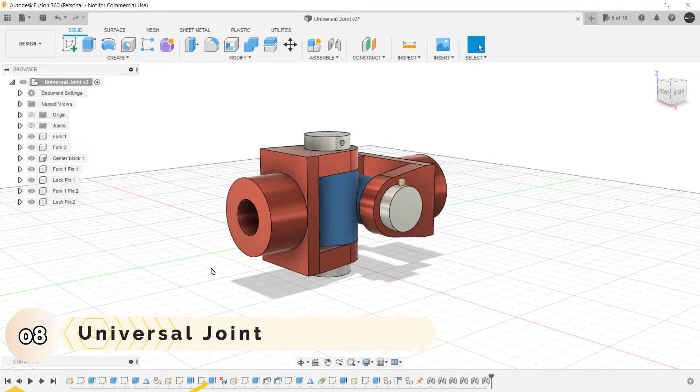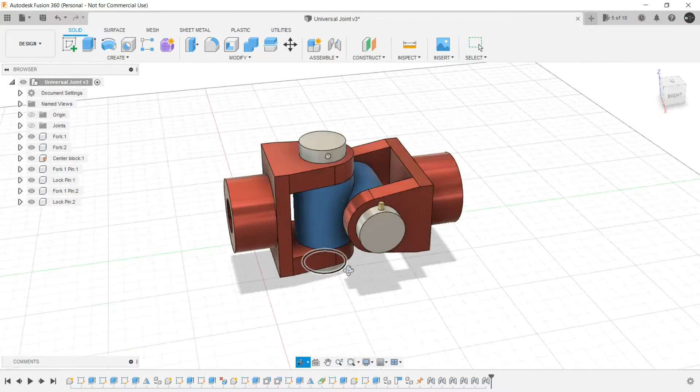Now the very first assembly that we are going to create is of universal joint. A universal joint is a joint or coupling connecting rigid rods whose axes are inclined to each other, commonly used in shafts that transmit rotary motion. It consists of a pair of hinges that we call fork, oriented at 90 degrees to each other, and connected by a cross shaft that we are calling center block here.

I have made this assembly beforehand for reference, in order to have a better understanding of how each and every component is connected to each other. Now let's start with the assembly.

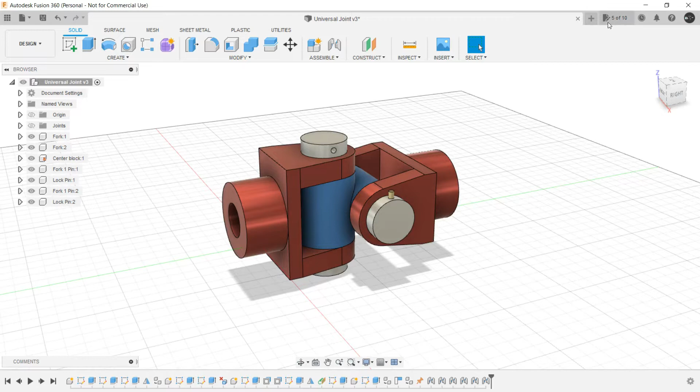Just click on new design. Let's save it, Ctrl S. Let's name it Universal Joint Exercise. And as you can see in the browser itself, the untitled status is changed to the name of the file itself. So this we are calling as a head assembly. This one is the head assembly.

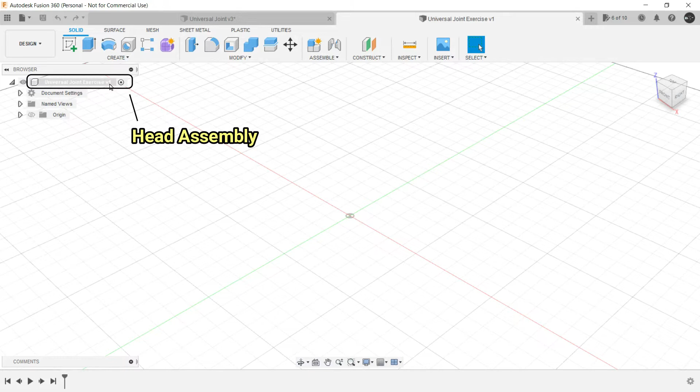Now the first component that we are going to create is this fork. I have hidden all the other components because we are going to create each and every component one by one. So first we are going to create this particular component, the fork. For this, go to assemble toolbar. Always go to assemble toolbar when you are trying to create a new component.

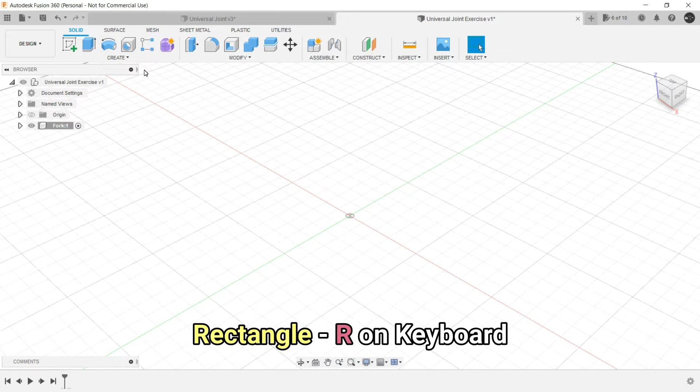Let's name it as fork. Invoke rectangle command, the keyboard shortcut is R, and select any of the vertical plane. Let's select this one. As soon as we have invoked the rectangle command, we have a sketch palette in which we have the option to change the type of rectangle we are going to make. Let's select center rectangle from here.

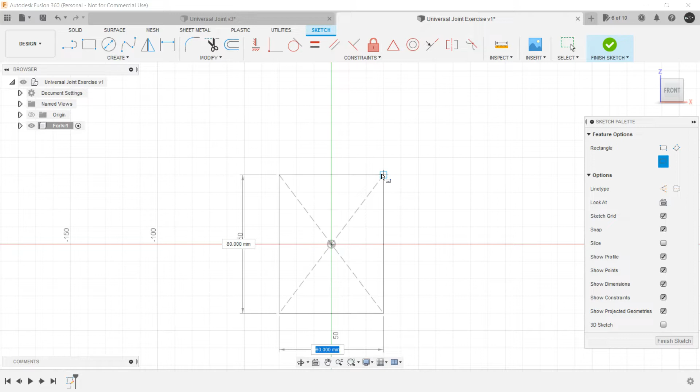And then provide any dimension, because all the assemblies that we are going to create in this course are not to dimension. My aim is to make you familiarize with the assembly making process in Fusion 360. You can incorporate dimensions as per your requirement or your client's requirements. I will let you know wherever some crucial dimensions are required as we move forward in the course. So let's select any dimension for now.

Click on finish sketch. Select this region, press pull. And then select this particular face.

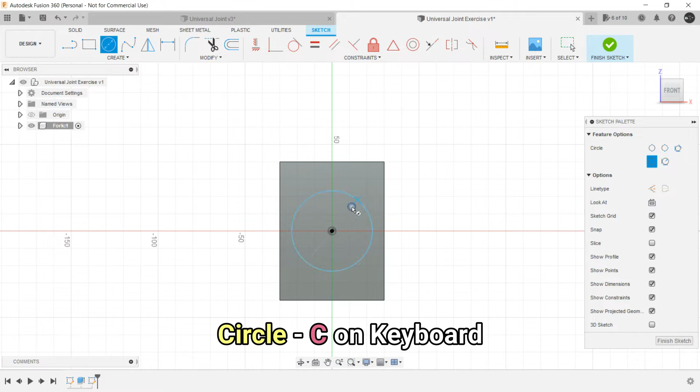Invoke the circle command by pressing C in the keyboard and create a concentric circle. Again, let it be of any dimension. Press pull this one outwards and click on OK. So we are done with this particular section of this particular component.

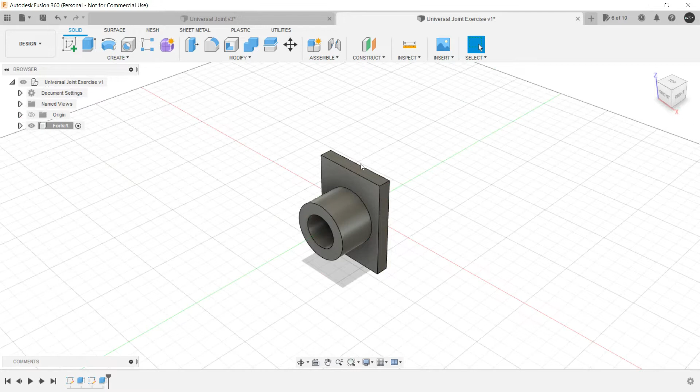Now we will be creating this profile. For this we will select this particular face, invoke the circle command, trace the origin, make a bigger circle, and then inside a smaller circle whose dimension we are going to remember. Let it be like 15, or better make it 18.

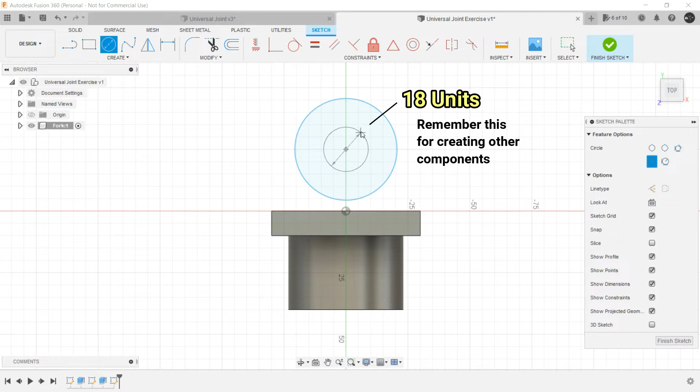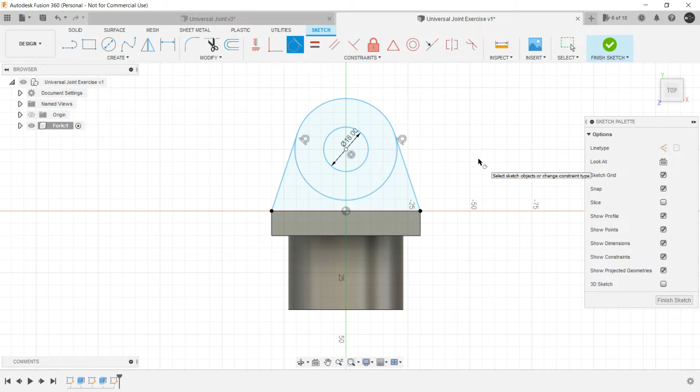Invoke the line command by pressing L in the keyboard. Select this particular point and select a point in which tangency constraint is being made, as you can see here. Similarly here. And if by mistake you have lost the tangency constraint, you can always get it from here. Select the line, select the circle. And let's trim some unwanted areas.

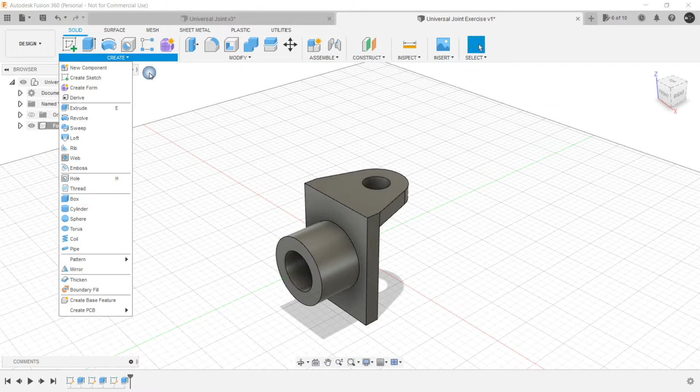Finish the sketch. Select this region, press pull it downwards. Now as you can see, we need this particular profile in the bottom as well. So what we will do, we will invoke the mirror command. Select the feature, select a mirror plane and click on OK. So this here creates our first component, that is fork.

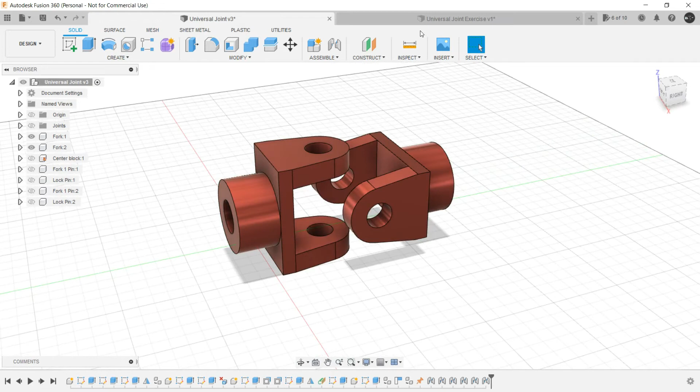Now we have to create another component, fork number 2, which is like 90 degrees inclined with fork number 1. For this, in order to propagate to the second component, we are going to make a slight adjustment here. We are going to use the inspect toolbar and component color cycling toggle. The shortcut for the same is Shift plus N.

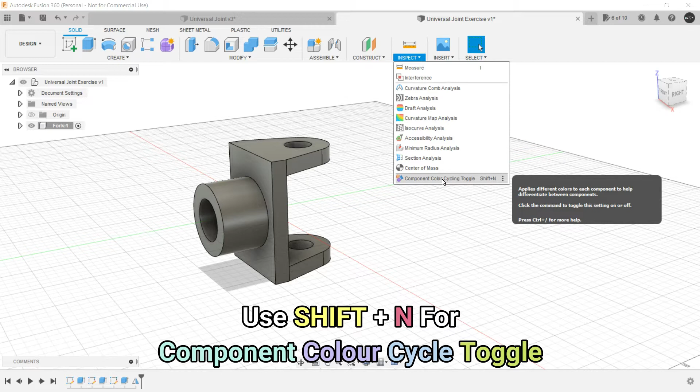When we click on here, the color of your component is changed. And as soon as we create new components, its color will also be changed. Same thing is happening here as well, because it happens in all the files in Fusion 360. Now invoke or basically activate the head assembly.

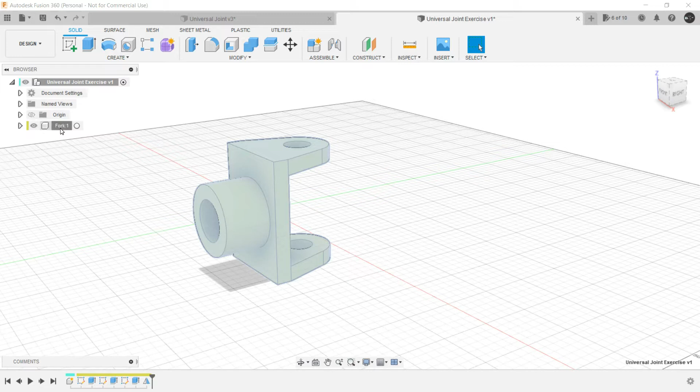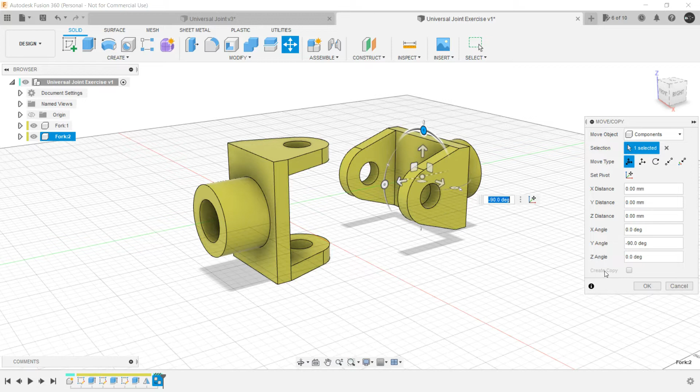Left click and select this particular component, Ctrl C, Ctrl V. Just drag it outwards, rotate it by 180 degrees and again rotate it by 90 degrees. And our second fork is also created.

Notice it is having the same color as the first component because it's a carbon copy of the first component. As soon as we create a new component, its color will be changed.

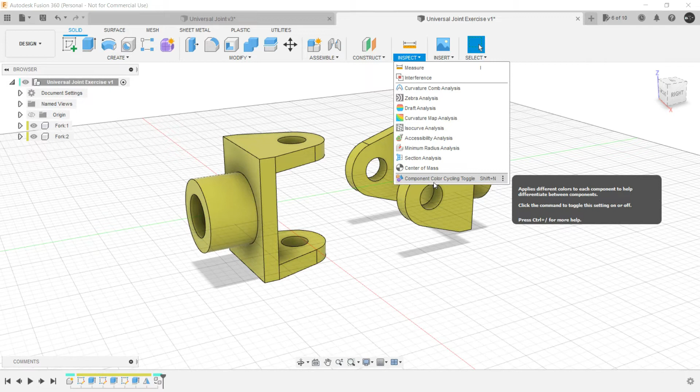That is the beauty of this particular tool, component color cycling toggle. Now next, what we need a center block. For this, again just see if the top assembly is activated or not, and then go to assemble toolbar, new component. Let's name it center block.

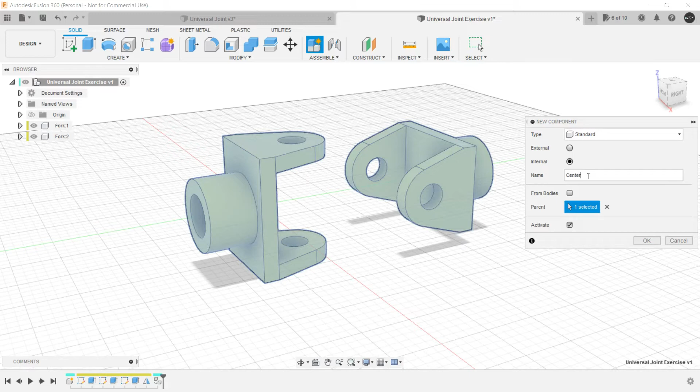Select this particular face and invoke the circle command. The outer circle should touch the outer circle of the profile, and the inner circle is obviously 18 millimeter that we have chosen.

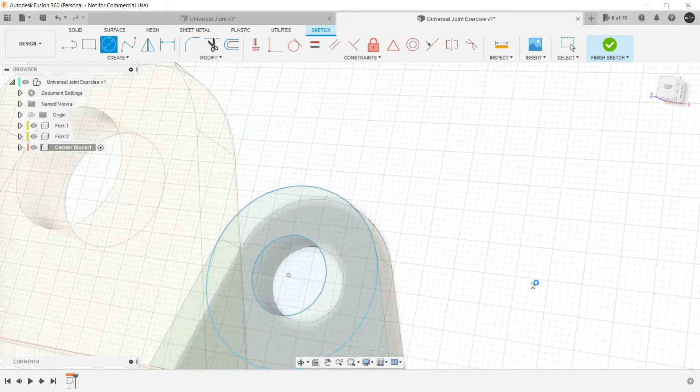Select this profile, press pull it, and make the extent type as to object, and select this surface. Obviously the operation would be new body for a new component. Click on OK.

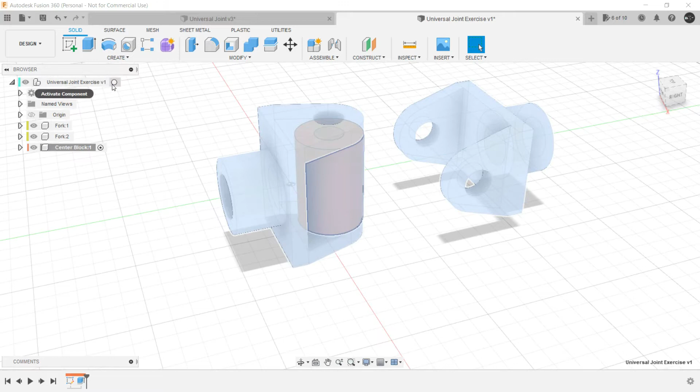And as you can see, this new component is having a different coloration. So this comes very handy when you are creating a very huge assembly and you need to maintain order with separate components. Now activate this center block only.

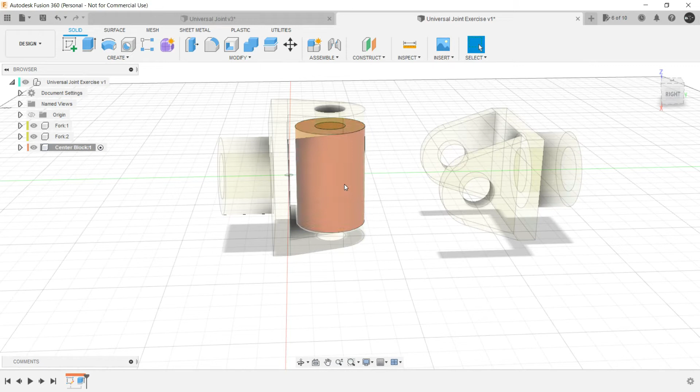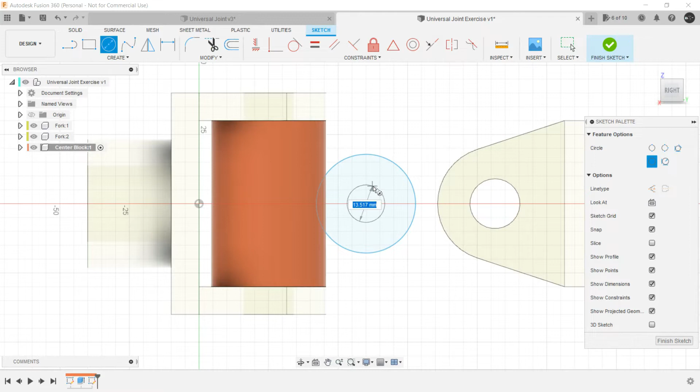And here we will create certain sketches. Create a sketch on this particular plane. Let's create a circle somewhere over here of any dimension, but the inside circle should be of 18 millimeter. This we are doing because we are going to fit a pin in between this.

Finish the sketch. Let's hide these two forks as of now. And now just measure the distance of this one.

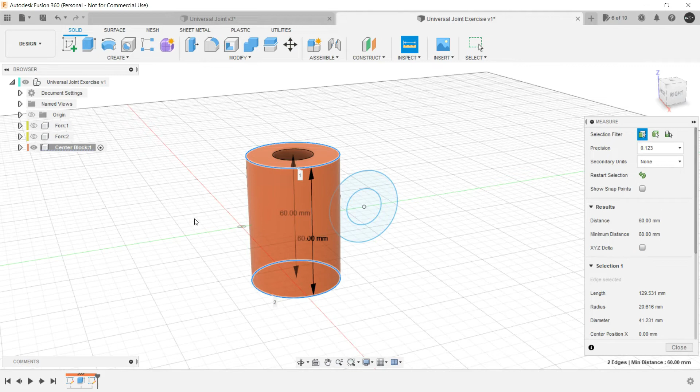This is 60 millimeter. So what we will do, we will select this profile, right click, press pull, let the direction be symmetric, and the distance should be 60 divided by 2, and operation should be join. So this created our center block.

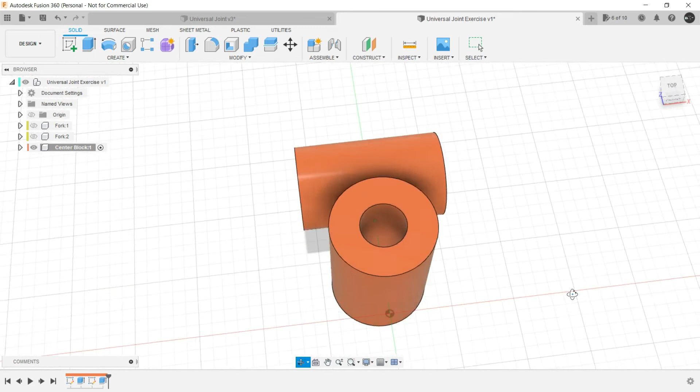Now let's activate the head assembly again. Now what we are going to do, we are going to create this particular pin now.

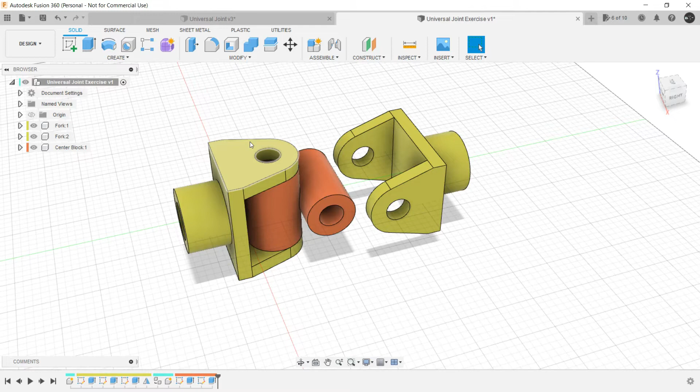So for this, again go to assemble toolbar, new component. Let's name it fork 1 pin. Click on OK. Now select this particular surface, invoke the circle command.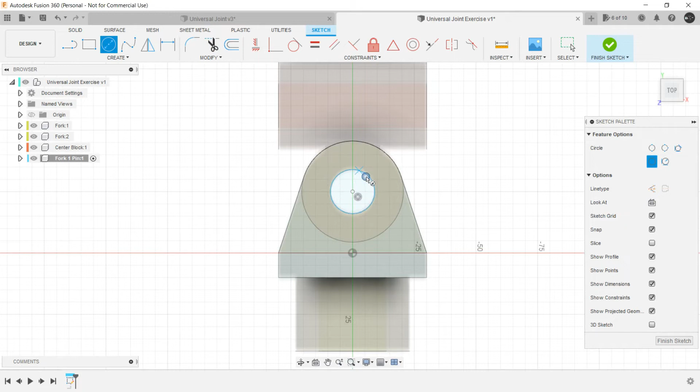Select the profile and again make the extent type as to object and select this particular surface. Click on OK, select this, press pull.

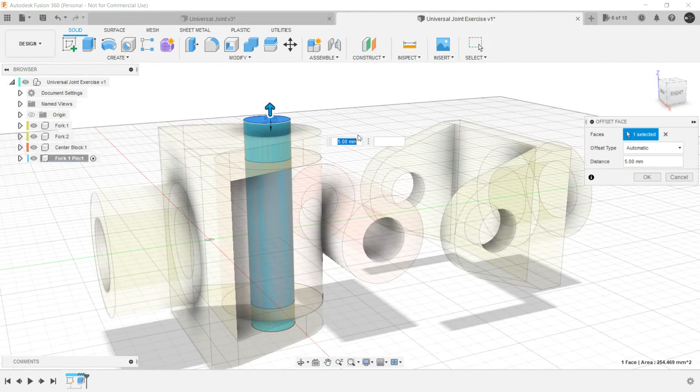Let it be like 5 mm up, and the same thing in the bottom as well, 5 mm.

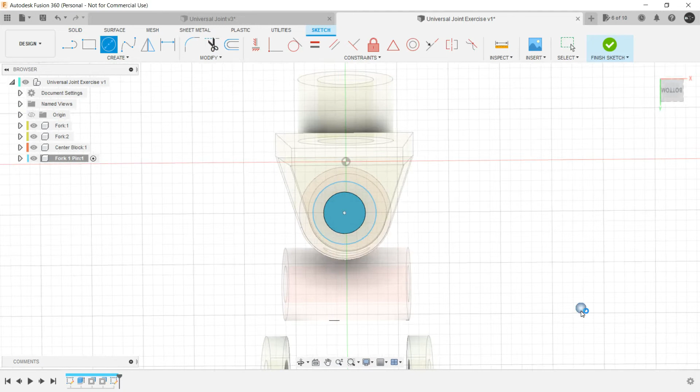Now here let's create a circle of bit larger diameter. Select this profile, right click, press pull. Again to object, and object would be this one, and operation is join because it's a part of this component only, the fork pin.

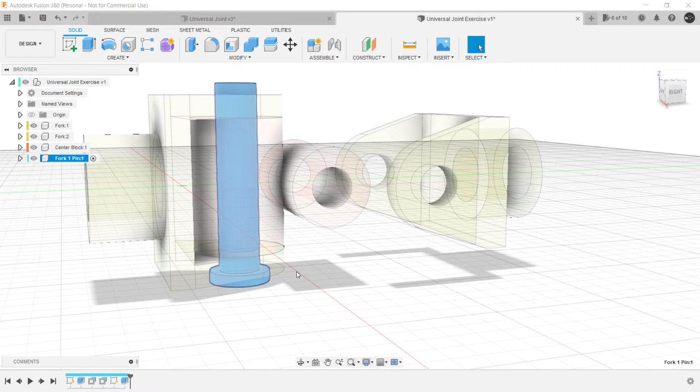Now next we are going to create this particular collar. For that, what we will do, we will again activate the main component, main assembly, head assembly. Go to new component, let's name it collar.

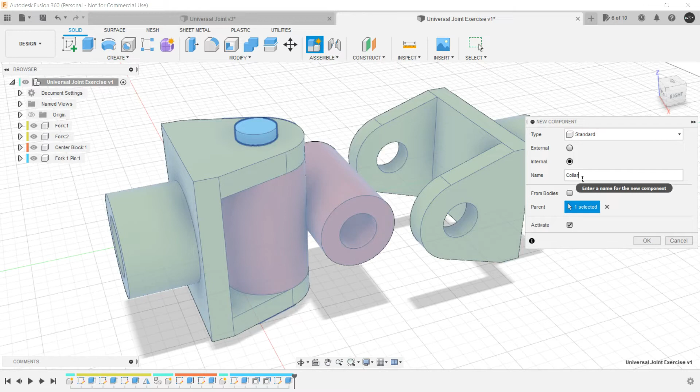Select this particular surface, invoke the circle command, let it be of any dimension, finish the sketch, press pull it, extent type again to object, operation would be obviously new body, and click on OK.

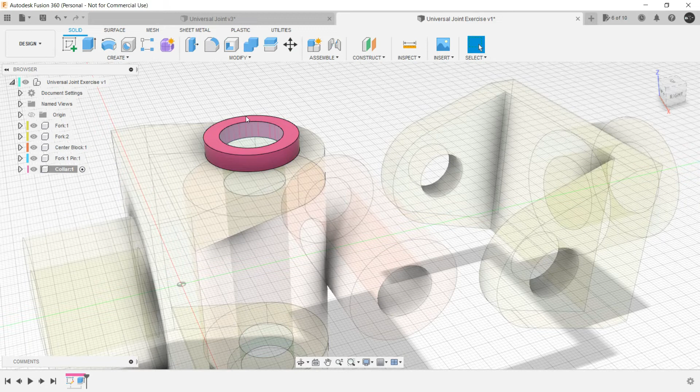Now activate the head assembly again, and this time select this particular face and create a tangent plane. Now on this plane, let's create a circular hole.

Now in order to do that, we need a point to snap somewhere. So what we will do, we will project this particular area and click on OK.

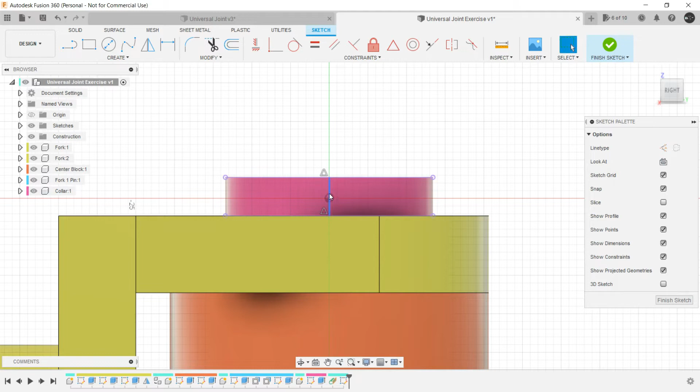And just create a line from the midpoint of this to midpoint of this one. And let's convert it into a construction line.

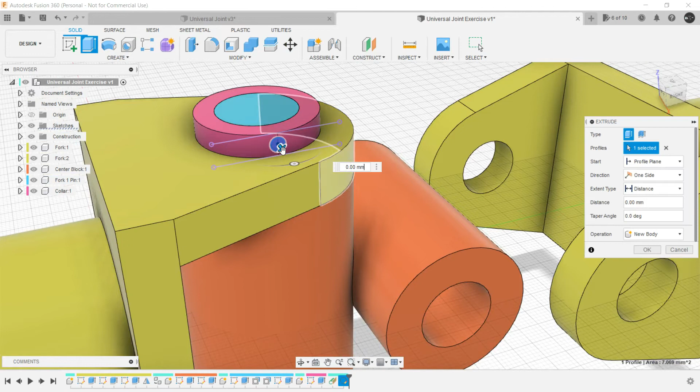Now from the midpoint of this construction line, let's create a circle, and let's remember its dimension as well. It's 3 mm. Finish the sketch. Select this, right click, press pull, and cut through all.

Notice that we are cutting through one component and it is cutting through the second component as well, because the head assembly is activated. Now almost all the components are made.

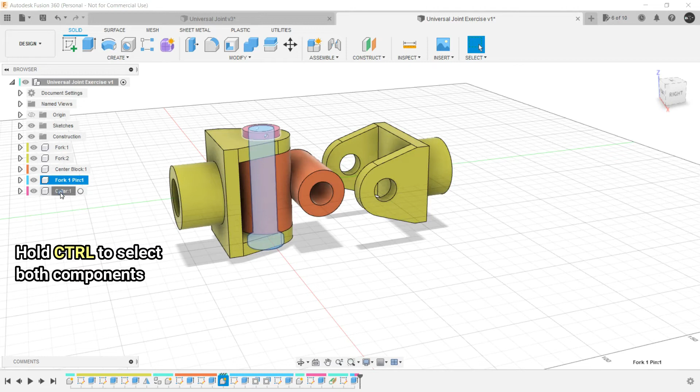Now the only thing remaining is to create identical components. This collar and this pin, these two components, this collar and this fork pin, will go here as well. So we have to create a copy of these two. Just Control and select both of them, Control C, Control V, and drag it outwards. And it has created two new components.

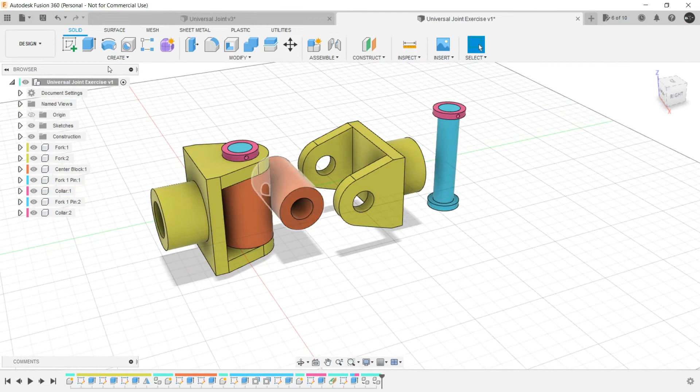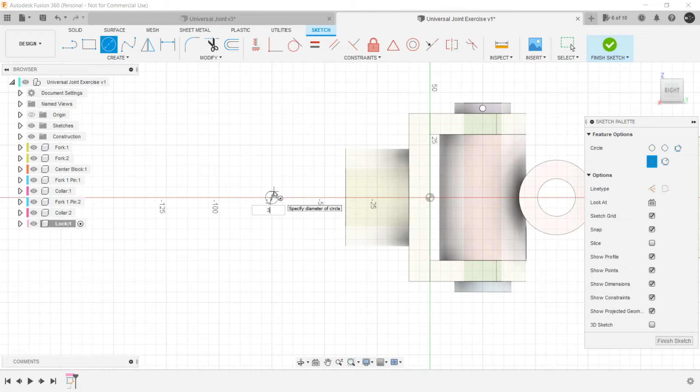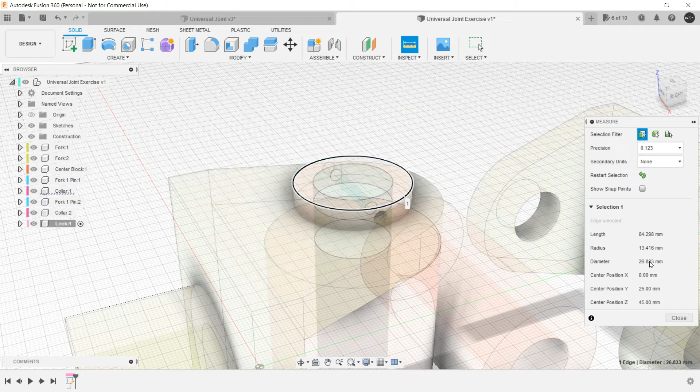Now the last component would be a lock that has to go between these. So for this, we will again go to the Assemble toolbar, new component. Let's name it lock. And let's create a sketch on this plane only, somewhere here. As you can remember, the dimension of the lock should be 3 mm. Now we have to press pull it outwards to create a 3D model. Now how much to press pull, we have to inspect from here. That would be the dimension of this collar: 26.833 mm. So we will be extruding it 26.833. Click on OK.

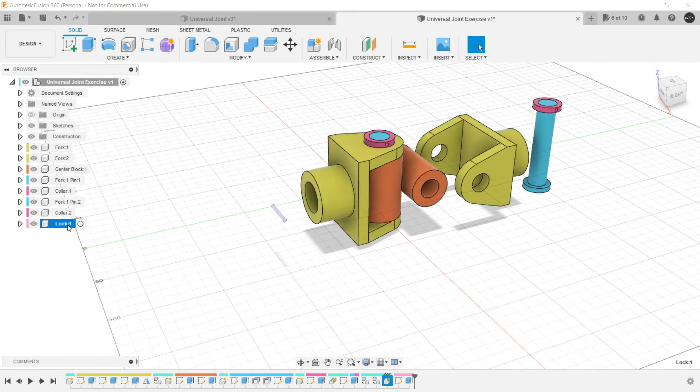Now we need one more lock, so we will again activate the head assembly. Left click on lock, Control C, Control V, and one more lock is created. And now we are officially done with all the components. Let's drag them outwards and see. So we have two forks, two collars, one center block, two pins for fork and two lock pins.

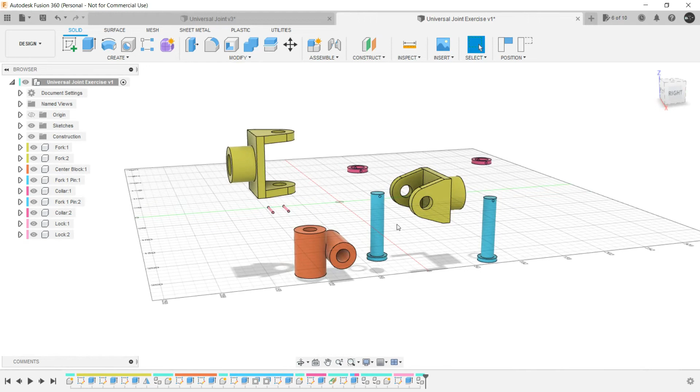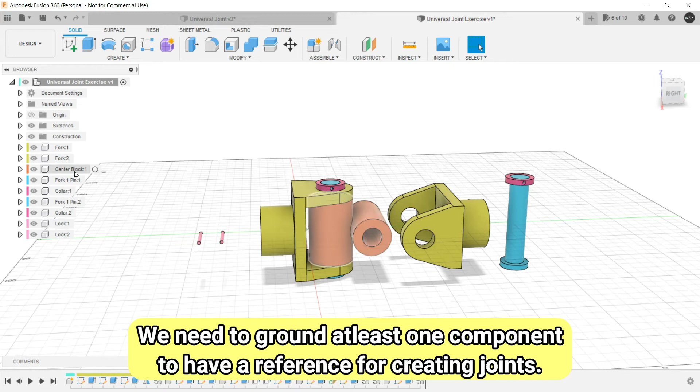Now it's time to create the assembly. All the components are here. Now we have to provide joints. In order to do that, first let's revert the position by clicking here. Now in every assembly we need to ground one particular component, on the basis of which all the other joints and components will be clubbed together. So here we will be grounding the center block. That means all the other components are free to move as of now, but this center block will not move. Let's drag all the components out and start providing joints.

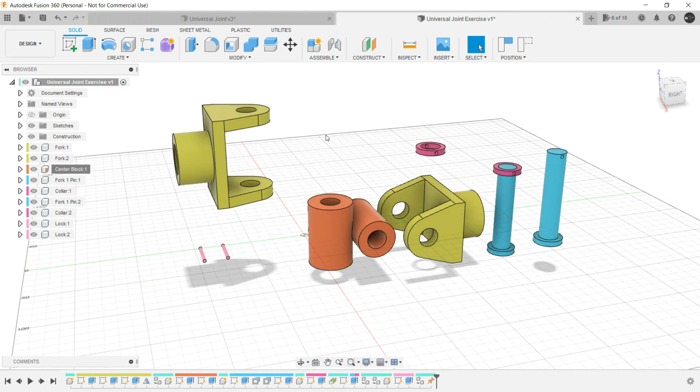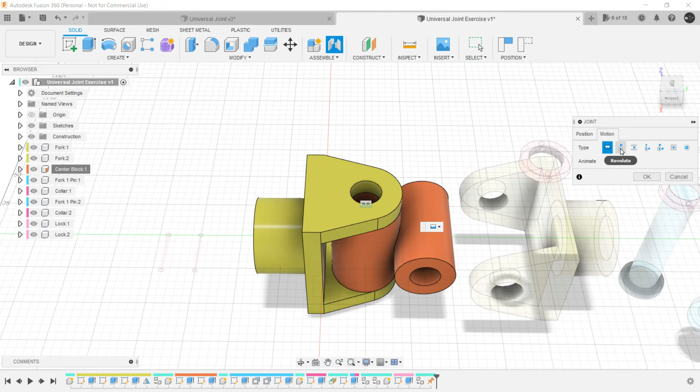So for a joint, again we have to go here, or we can use the keyboard shortcut J. Select this particular face and select this particular face. This joint should have motion of revolute. Now for the next one, again click J on the keyboard. Select this particular face and select this particular face. You have to be very vigilant when creating joints. You need to understand which particular face or portion of the component should go where. Here also the motion is revolute, and click on OK.

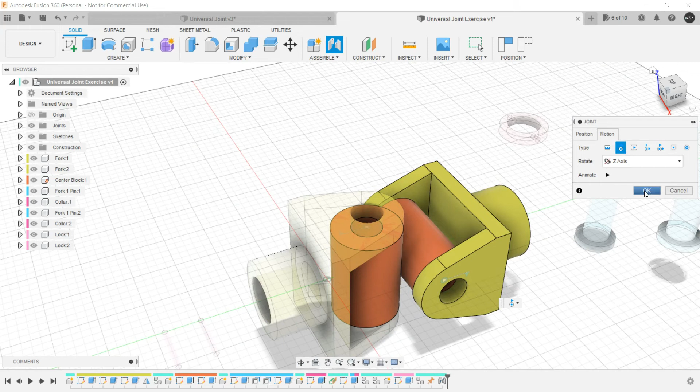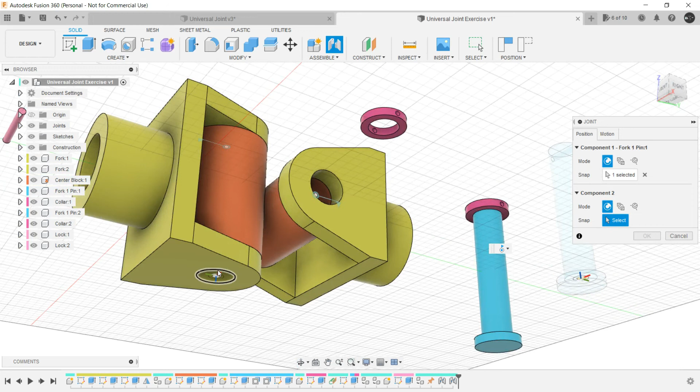Next is providing these pins. Just select this particular face and this particular face. It should not be a revolute, it should be a rigid one, and click on OK. Let's see if this is rotating or not. Yeah, it's rotating.

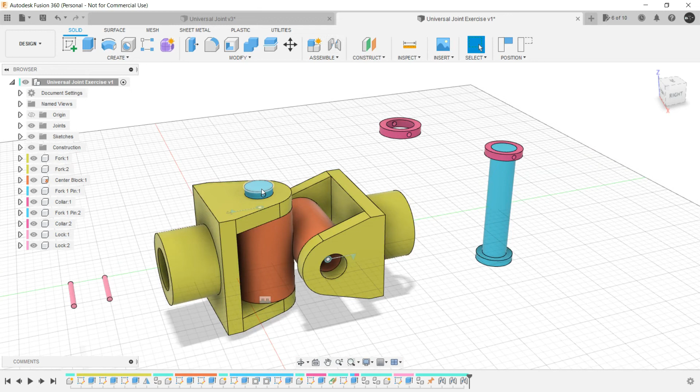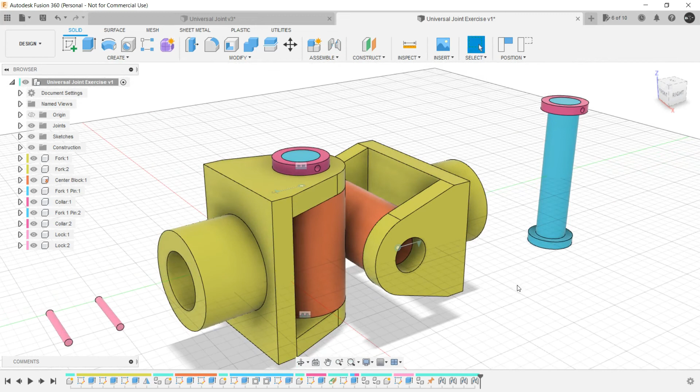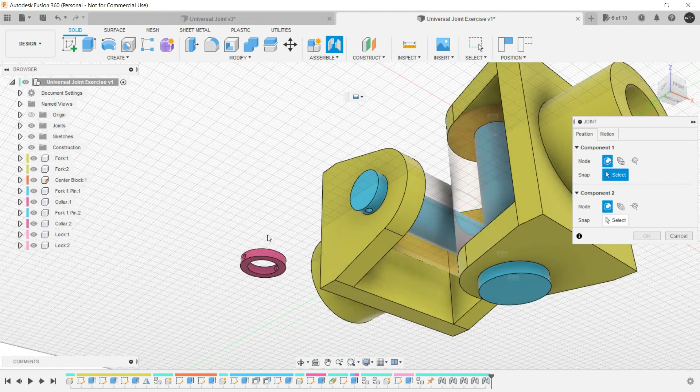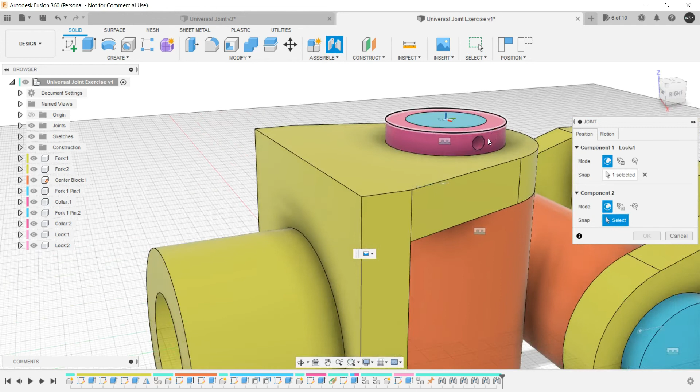Now attach a collar to this pin. Click on joint. Select this particular edge and this particular edge. Similarly here also. And then just attach these lock pins. Select this particular edge and select this particular edge. Similarly here also. Select this, and select this.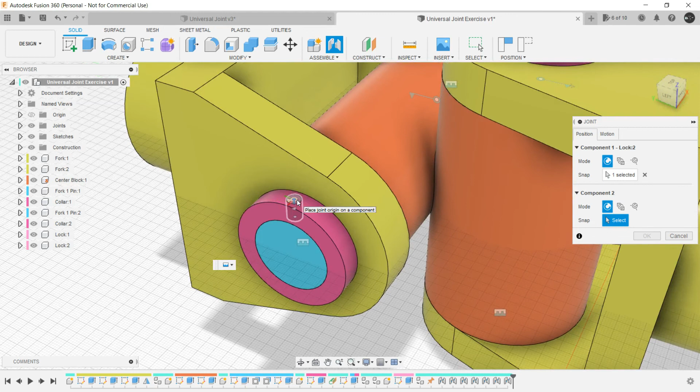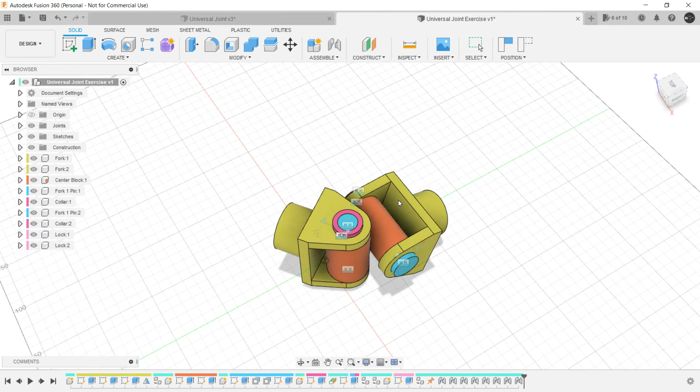Now our assembly is fully complete. But as you can see, when we are rotating, it is overlapping with the other component. The same thing is happening here as well. So what we need is some limits.

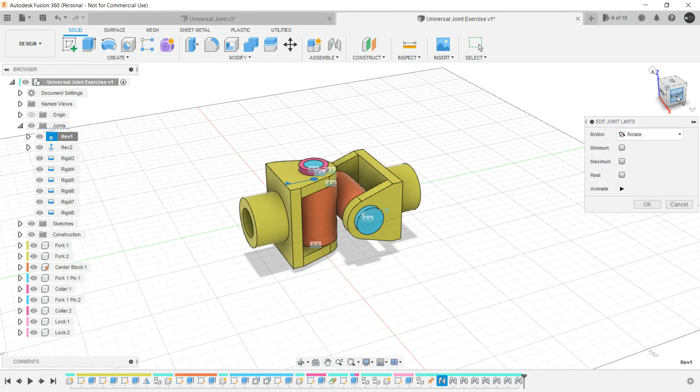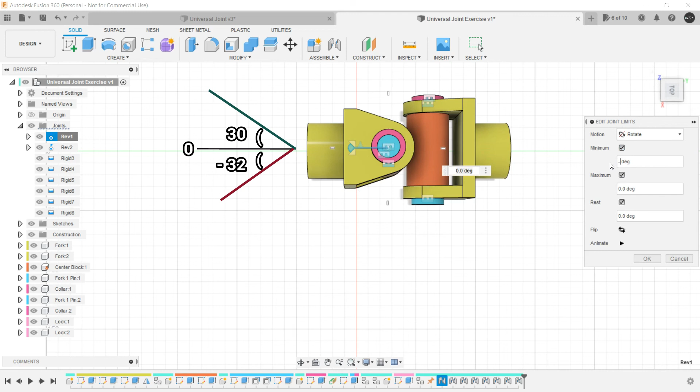We can provide limits to all these joints by going to the browser and selecting the respective joints. Let's select this particular joint. Right click and edit joint limits. Let's select the right face so we can clearly see what is happening, or better select the top face. Now for universal joints, the ideal limit is between -32 to 30 degrees, so we will be using that. Initially provide the rest position at 0 degrees, then provide the minimum as -32 and maximum as 30. Just animate it and see.

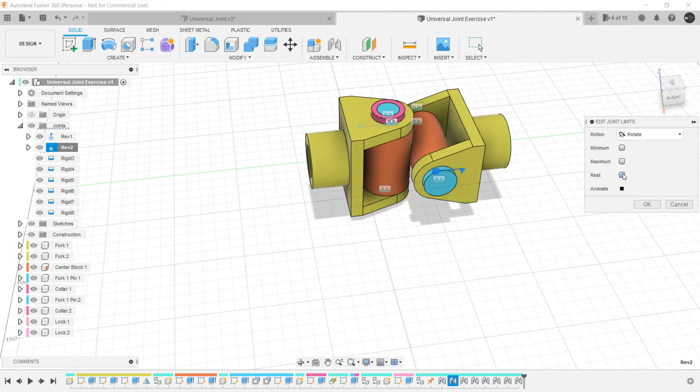Perfect. Click on OK. Same thing we have to provide with this particular joint. Let's go to the right view. Rest is at 0, minimum as -32 and maximum as 30 degrees. Click on OK. Hide the joint. And our assembly is officially complete.